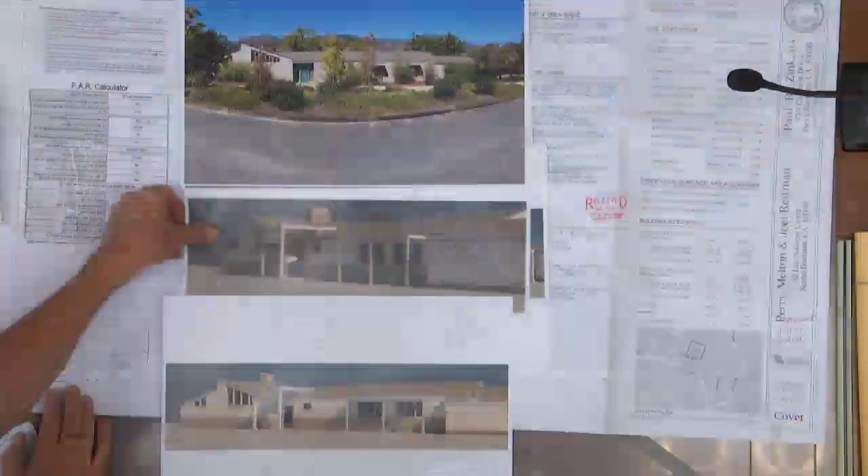Those other options are in this set. The one I preferred, that I thought was a little better, was the flat version. I thought the angled one conflicted, and I thought the flat was better, but the designer and the owner are passionate that they have this kind of style with this configuration. So that's an issue, and they wanted the full board's input.

Denise, did you have any comments? I agree with Brian about this, that the flat configuration, cantilevered without the posts in the front, was more desirable. Okay, so that's why you brought it back. So if you could kind of share with us where you're headed.

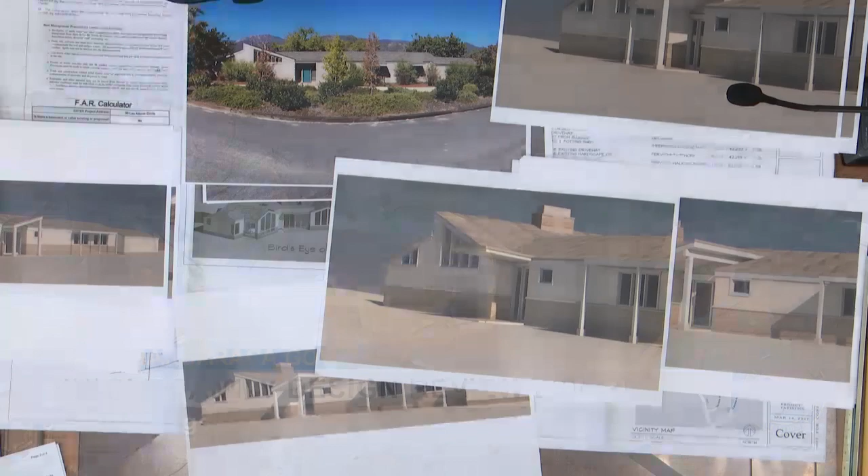Brian had basically asked, did you consider other options? During the design process we did, and then we went back and revisited it, and we changed and tweaked the look. This is the look that the client and I have gone back to a couple times, and that's what we're happy with and want to go with.

Since then, we're looking at it. What's interesting about the existing house is that there are some very strong forms, but the front entry is very nondescript. So that's where we're trying to create an entrance that says, hello, this is where the front door is, come take a look at us.

So we don't have a problem having an angle here, because this angle relates to the angle happening over the master bedroom. But you can tell by the landscaping, it's not really prominent or evident. Approaching the house, you'll be able to see this. So to me, it's an architectural element.

This is very quiet and almost lacks any punch, more punch than what's currently here, because this is completely understated. In reviewing it, going up to the house after we met with Brian, they are leaning towards this way only because they feel forced to or required to.

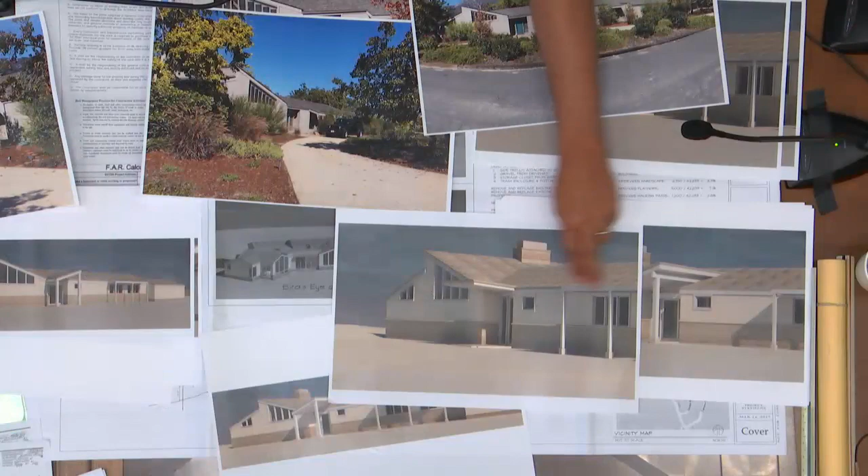If we were to go with a solution like this, we will change the overhang that we currently have. This is a pergola that we have that'll have a shade cloth on top. The reason there are these existing little eyebrow roofs, part of the architecture, is because it gets beaten by the sun, both on the south and on the west.

So I actually have a horizontal element because these come down and block the head of the window. So when you're looking out the window, you see the underside of the roof. In designing this, one of the principles was how to create a shade structure for these windows that didn't block the view but shaded the windows, and then have something completely different for the front entry. That was the design theme, and having the angle of the roof was a great quote of the other architecture on the building.

Could you show us the flat elevations, please? Yes. Oops, sorry about that, I thought it was empty.

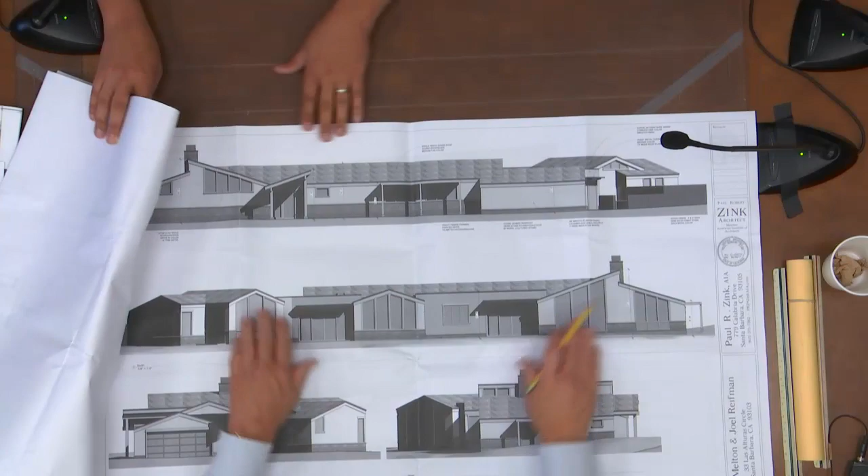I have since put these, once again, in 2D form in the computer, but these are basically flat 3Ds of the computer model. This is where we are, and this was the older version where Brian commented, can you please go back and revisit it?

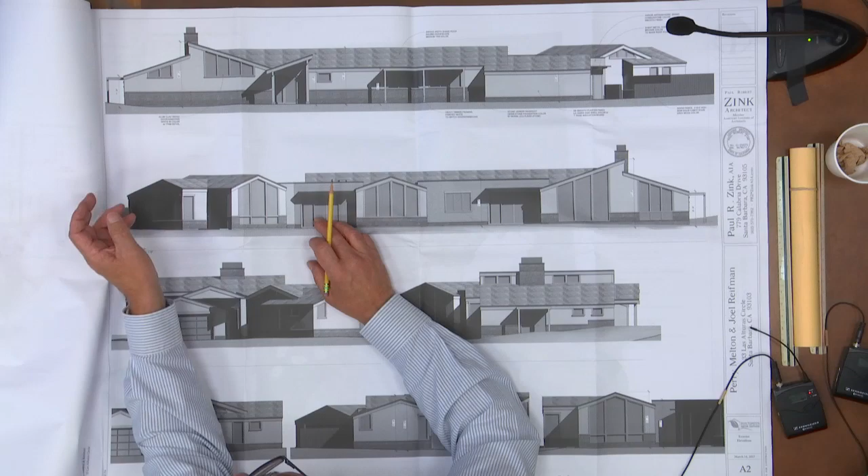One of the principles was we have a major beam inserted into the main living room, so for me it was trying to have a continuation of this beam from the entry all the way through to the living room. That's how this initially started. When Brian made his comment during the design review, we ended up removing that beam and taking the columns all the way up.

The other interesting thing happening is this corner right here, we have some horizontal siding above the door that turns the corner slightly. It relates to the horizontal siding we have at the back of the building. Now at the back of the building, we do have these lower 24-inch metal overhangs.

This is probably what we would quote and put over these two windows. If we were to make this a cantilevered roof element, I would take this design theme and put that over here, and I would pull these windows apart, because I intentionally forced them together to have one element—right now there's two windows that are like this. All right, questions of the board?

So where we are right now, what you're proposing, what we're asking you to do is to flatten this and give us that. So we're gonna end up flattening this thing and just cantilever it out with no posts.

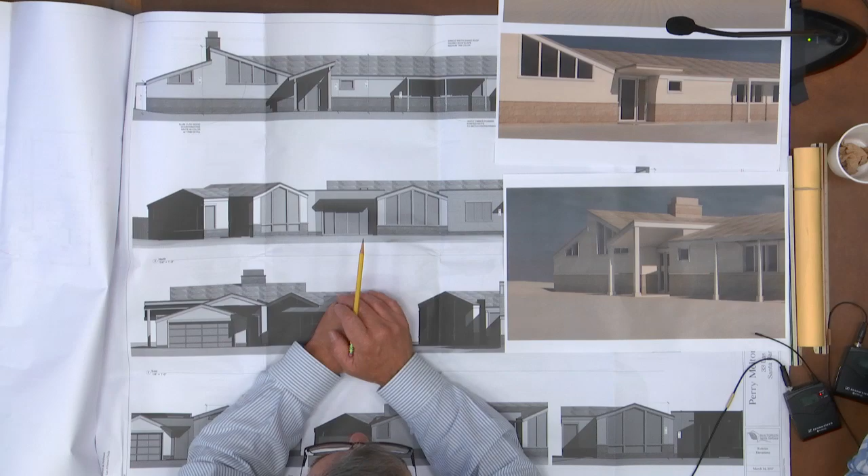And you're gonna remove these posts over here? If we go with this option, then we will remove these posts and we'll change the detailing of this to match an overhang that we have at various parts in the building. It's not our preference, but it's the backup, because we have to look at it. Okay, other questions?

Will you have an intense landscape program to go with this? Yes, we have a complete redo of the landscaping. This is high fire, so we're not allowed to put anything on the shade structure, so it's not a pergola per se. Having vines growing up and over these columns isn't an option for us.

And Denise, you've already looked at the landscape plan? Yes. Paul, are you proposing a glass garage door? It will have opaque panels, but yes, it will be that style. So it won't be translucent.

Okay, another question. So these are new windows? Yes, they are. And they're going up, is it 7 feet or 6'8"? I'm picking them up to 7 feet. Right now they're 6'8", so that line right there is roughly 7 feet. Correct? Okay.

I have the existing elevations if you want to see them drawn. Just so you know, the window structure changes from the original house because they were originally 3 bedrooms, and we're making... understand.

Okay, I'm gonna take some effort here, but just to get this to move along. I think that I could live with this, but it needs to be...

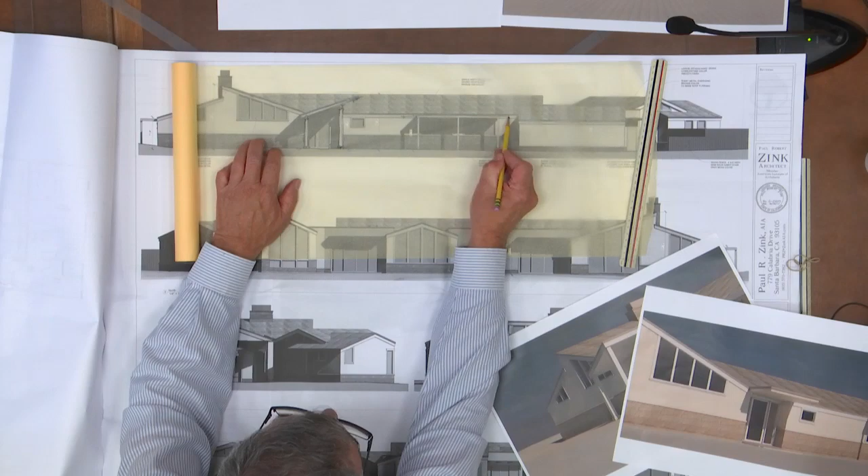And I would extend that out, and I'm trying to get a proportion of 2/3, 1/3. So get this to be 2/3 of this angle here. Let that go up, and then take these guys and really get them out here and use the same language.

Okay, and then you get a shadow line down there. Then I think, and if you possibly could, get that glass to go up here. You've got glass cutting the edge of that, so let that be glass, let this be glass, let that all be glass, and really buy into the statement you're trying to make here. That allows you to get a shadow here and that shadow here. Then I think it kind of makes sense, because it's a proportional thing between that and that.

And let this beam, don't let that beam - the problem with this beam is that if you let it, then you have to deal with dry rot. So let this eave come like that, let the beam come here, and then take this column so it's sitting back, the beam's kind of hidden more. It comes back under, then you don't have to worry about the maintenance, because if you bring it out like that, then I always put a piece of copper over the top of that, because otherwise it just gets dry rotted instantaneously.

So you either do it that way or do it like that, and then put a copper flashing unit over the whole top, have them fabricate a piece of copper over the whole top. That saves you forever. If not, get it tucked back in, but let this thing do that. Pretty wild, quite a statement. I mean, if you're gonna do it, do it.

So the opaque material is what? It'll be glass, but that milky white glass, not clear. Here's the garage door for this. We haven't finalized that. Okay, well, you're going to get it finalized one way or the other right now.

Brian, what did you guys make comments on? We made no comments on the garage door. That kind of slipped through the cracks, so that's up for comments now. Here's the garage door, here's the cul-de-sac, so it's not a garage that faces the cul-de-sac.

I do understand the concern about having clear windows, because when you turn them on, they look like a fluorescent light fixture, so that is not what we're proposing. When I say it's opaque, when the garage door goes down, it's like, wow, look at that contemporary house, isn't that cool? But when they turn the lights on at night and forget to turn them off, it's not going to glow like a kitchen ceiling.

I've been going around, and since Bernie keeps bringing up these opaque or lit garage doors, I happen to look at them constantly as I drive around town. They don't put out any kind of torch, they just look like a garage door with some light behind them. If the light is allowed to shine through, yes, it lights up the whole area, but garage doors that are just opaque lights do not brighten up the neighborhood.

I'll address that, because I know there are a lot more of them around town, and they're easier to spot - while you're on Shoreline, while you're on Balboa, there's one. They're coming up all over. So I think in terms of neighborhood preservation we have to be careful, because they're very modern. They do change the character and feeling of a neighborhood, and maybe they're okay in some neighborhoods and designs, but I think we should be cautious.

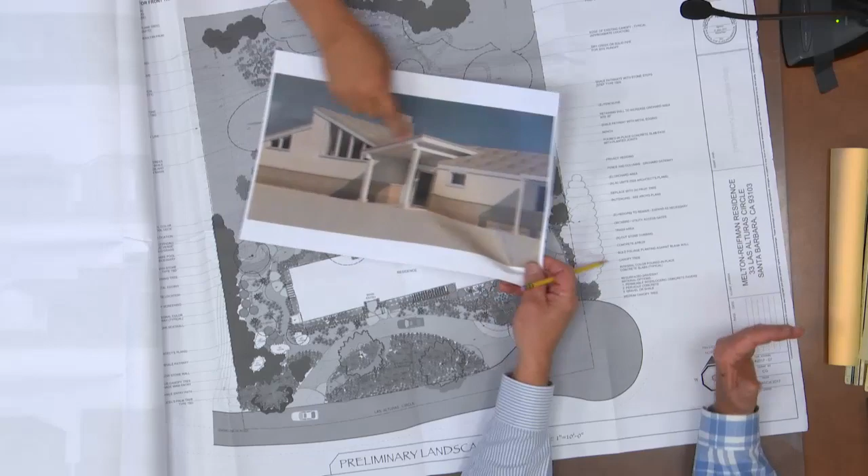But we're going back now, we'll make it a little longer. I felt that this was complicated and that they were fighting each other, so that's what we resolved, some. That was my opinion. Other comments?

I think the house is a modern enough house, and it's in an area that could have a garage door like this. Okay.

I'll just point out, given the landscape plan and the position of the door, and having been on the street, as you recall we have reviewed extensively a house here. We've reviewed extensively another house that Paul did down on this side. We've had this whole community come out and be at this meeting, so we've looked at this neighborhood, this particular street, extensively.

I agree with my colleagues, it will have less of an impact versus the ones we see over on the Mesa where the garage doors face the street and do glow. Not all of them glow, but they do glow. In this case, I think I could live with it since it's facing almost nothing, given the end of the street here. So I'm less concerned in this particular case than I usually am about garage doors.

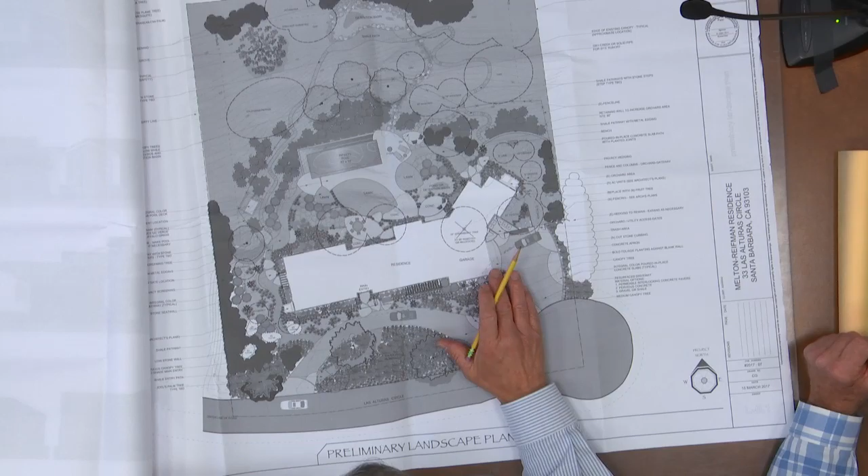Okay, other comments? If not, I think what we're required to have is some kind of motion. Katie, is this a final approval? What's the process? It's eligible for project design approval, not final. So if we're so inclined, we can give it project design approval with comments, or direction, whatever the board's pleasure is.

And then if for some reason we decide to go with another option, we'll just go back to consent with option number four.

So the chair is looking for a motion. The board would like to give this project design approval to return to the full board. Can we go back to consent? This is a one-story building where we're more than 4,000 square feet, but we're only doing a 1,000 square foot addition to the existing. I'd recommend consent. Okay, to return to consent for final approval, correct? Final in two weeks? No, indefinite. Final drawings take a while to do.

And the board finds the architecture to be appropriate for the neighborhood, with the comments that the roof and entry eave be configured in a way similar to the suggestions made by Mr. Sweeney. And that we approve of the glass opaque garage door.

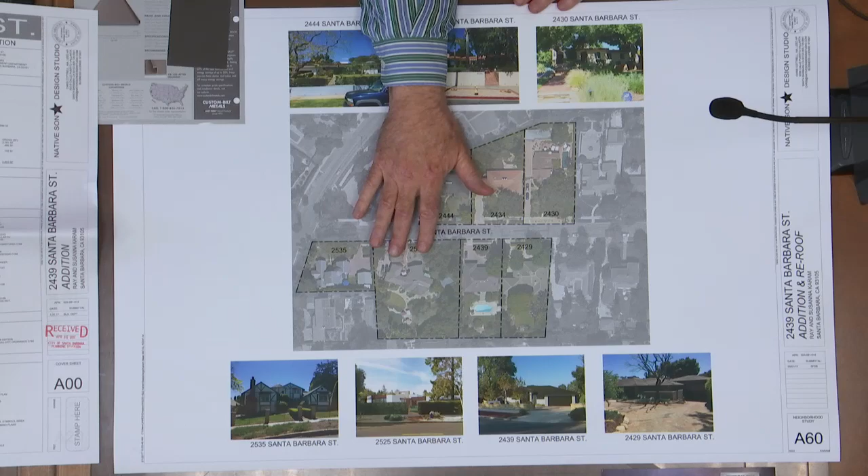I'm going to hand it over to Chris to give you a little bit of the background story. This house at 2525, presently occupied and owned by the Karams, the same people making this application today, was a Brett Edinger project that is approved. When the house next door at 2439 came available, the Karams said it would be great if they could purchase that home so they could live there while overseeing construction of their other home at 2525 Santa Barbara. So they completed that purchase and are in the process of remodeling 2439 so they can move in and then begin 2525.

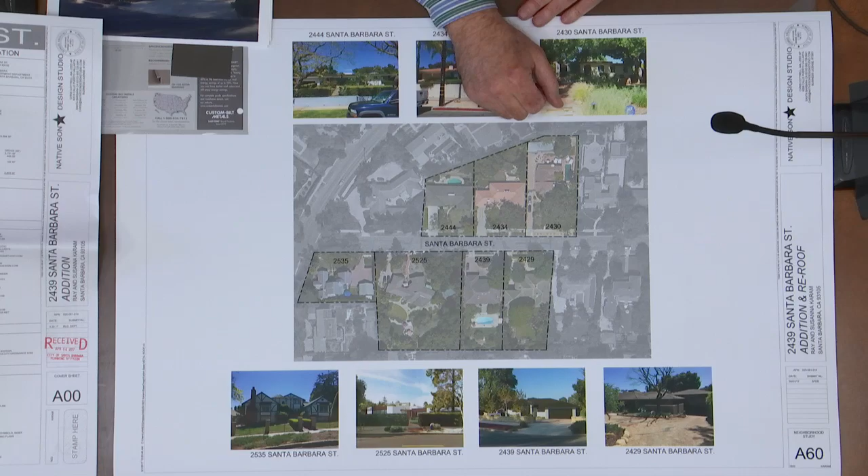As they were looking at all the materials available and what their particular style is, they said they'd really rather go with a standing seam metal roof on this house rather than fiberglass shingle, CertainTeed Presidential, or whatever else was approved. They think it fits well with the form of the house, and it's obviously very similar to the other houses in the neighborhood. It's a full hip roof form—nothing has changed—but they like the aesthetics of the standing seams coming up and meeting on the hips and at the ridges.

They're also very interested in PV, photovoltaic panels, which will go on the south side of the house. They're particularly well adapted to standing seam metal roofs, with little brackets that slip right over the standing seams—no boot, no penetration, just holding on to the seams.

Can you explain a little more what those are? Yeah, so this isn't the color we're proposing, but this is a typical standing seam roof. Traditionally, solar panels are mounted on a boot that goes right through your roof material and bolts into the sheathing. This bolts right to the seam, so there's no waterproofing issue at all, no penetration at all. So that's one of the drivers, together with the aesthetics.

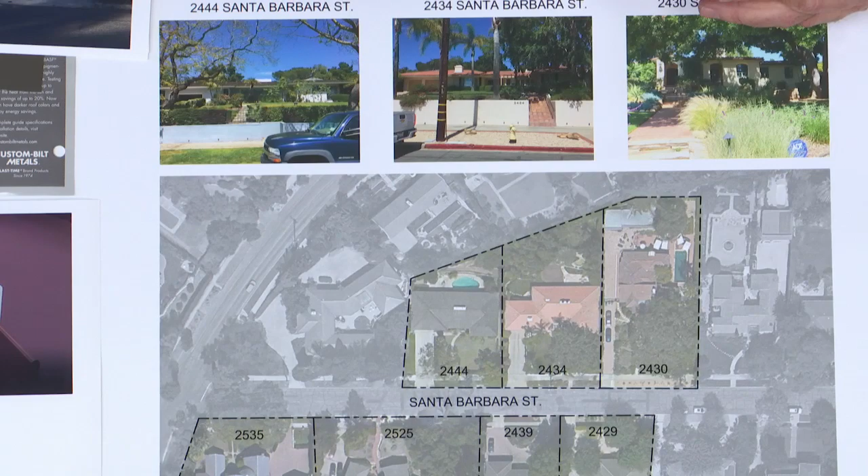It's an environmentally superior product to fiberglass shingle, and it's obviously fire safe. The color we've selected is called antique copper, but it's weathered, really to match the anodized bronze windows used in this house. The window profile is actually very thick—they're Schuco, a German product—so the gutters are the same. It's a house that's evolved over time, built in the 60s, which had a shake roof initially, and when the project started it had a very heavy concrete tile roof, a Monier tile roof, that's been stripped off. The framing really wasn't strong enough to handle that roof, so we're proposing to go to a 24 gauge steel baked enamel finish roof.

Okay, is that your presentation? At least for now. All right, so is there any public comment or letters? No mailed in or written public comment. Okay, thank you, so I'll bring it to the board—does anyone have any questions?

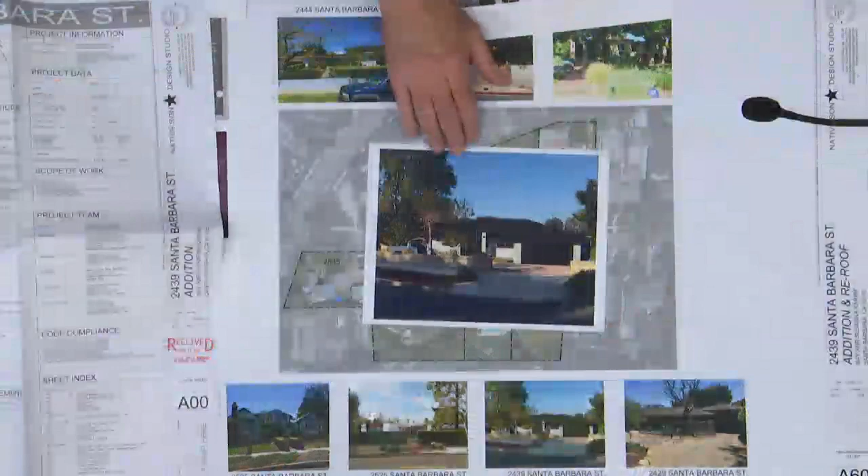Yes, thank you—can you show us what was approved the last go-round? Yeah, it was a presidential asphalt shingle. Can we get a visual on that? Thank you, and this is the rendered view with the standing seam. Oh, I see. Sorry, we should have put that up for the public to see.

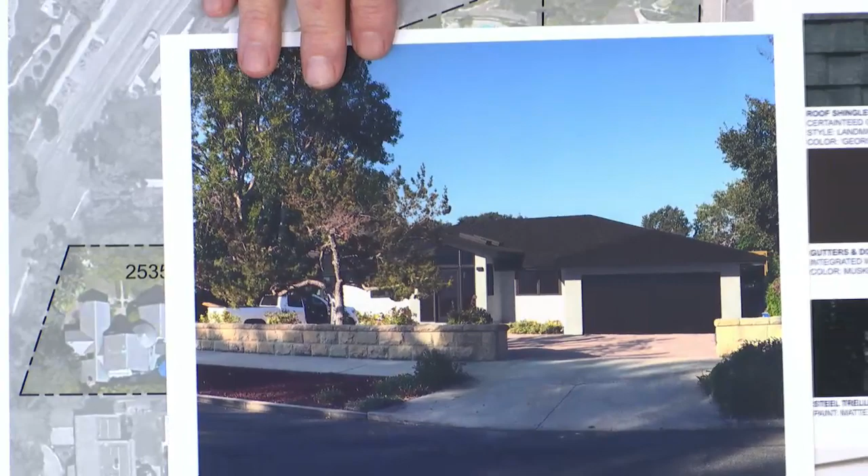Can you tell us how many of those solar panels there are and what they look like? The solar panels are on the south side of the building, not facing the street, so they can't really be seen. They will essentially cover the entire south-facing roof plane, which is on the back of the house—so that entire plane will be filled with those.

So are there any neighbors on that other side that look into it? No, it's pretty well isolated. We don't have a copy of the assessor's parcel map, but the parcels in this area are all relatively large. I'm familiar with this area, they have extra long, deep parcels on the outside.

The two adjacent houses shown are exactly parallel — this is proposed, and this is the subject, and this is the joiner. The roof forms on these houses are all very similar, they're all full hip. They've transitioned — this one is still wood shake and needs to be replaced, this one was transitioned to a simulated, I'm not sure if it's S-tile, but it's a Spanish tile appearing roof.

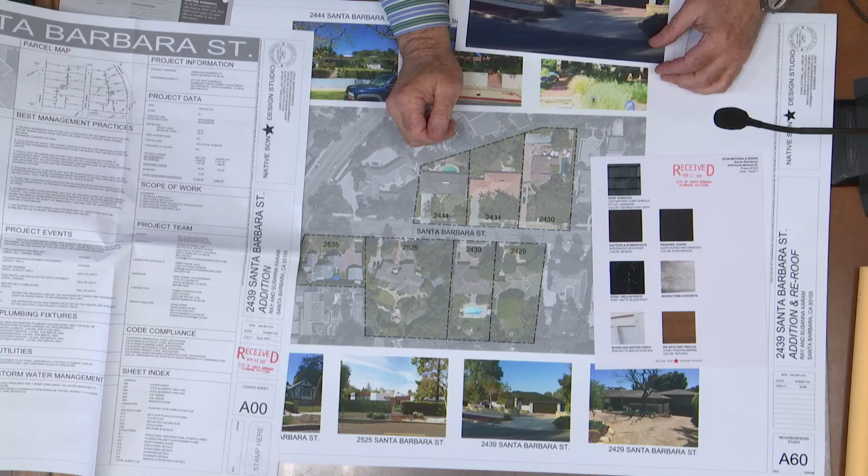So are there other houses in Santa Barbara using this technology? The standing seam roof is a technology that's used frequently in Mission Canyon. No, I know about the standing seam.

I'm asking about the solar — hanging the panels that are going to be all over the back of it. Oh yeah, that's standard. That's one of the chief advantages — you don't have to have a steel frame with penetrations through the roofing membrane. There are a lot of solar paneled houses here in Santa Barbara, and the criteria usually is that they're not seen from the street. That's a city requirement, because the state of California says we really can't stop you from putting solar panels on. It's state law, you can't interfere, but most people are coming to you saying they're putting in solar panels and they show them on their plans. They don't want to have a fight.

So here's just the existing site plan again. There are some changed statistics. There's about a 50 square foot increase in what we're proposing from previous, and that's just because of addressing the comments where we were playing around with the second floor where that landed.

So here again is the proposed site plan. The darker areas are the first floor additions. The crosshatch area is the second floor addition, and then here is the second floor deck. There was an interior change - we relocated where the stair was. Originally it was up here, so we basically flipped this on the floor plan. The other minor interior changes, I won't go over those.

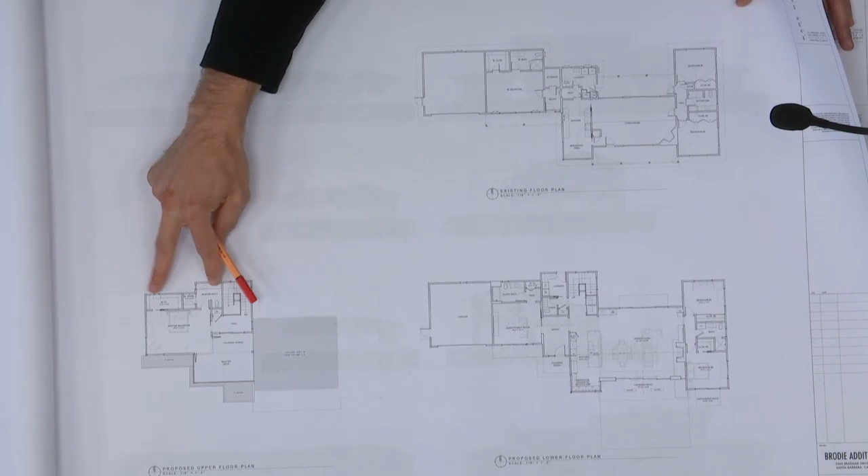Second floor has also changed. We pulled that back in a little bit, and what that did is it shifted all of this mass closer to the intermediate mass. So now, this used to be over here more, and there was a gap in this portion, so we've made things a little bit cleaner. I know that was one of the main concerns.

The other item we've made here, which is a comment from the board, was regarding the breakups. We've made that more consistent throughout.

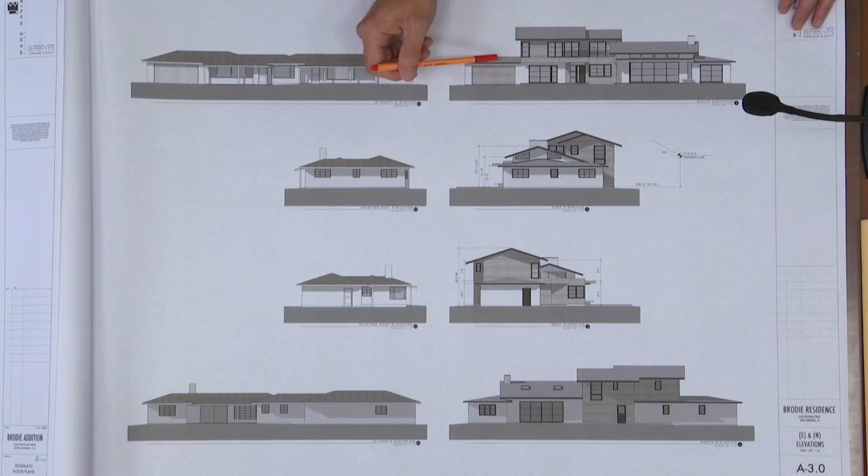We looked at a couple different options for the roofs in terms of the hip versus the gables, and we felt like it just became too modern when we did a flat roof on the lower floor and kept the gable on the top floor. But these are actually being reframed at a lower pitch again. The intention for these is to make this feel as if it is just lower - we're trying to make this feel more important. So that's why we were lowering these pitches.

Also, for the appearance of these lower pitches to have that flat look when you're standing at the house, and for this to be the more prominent roof element, but still have the softening effect of the overhangs and the more traditional effect of the overhangs as well.

There was a concern also with a lantern effect for the south elevation. So this is a view of what you would see. This is some of the existing screening on site, and the house is back over here, which the second floor would come up a little bit. But you can see that you aren't going to see a huge amount of this structure. They really don't want to do a whole lot with that lower portion of the lot. They want to keep it pretty natural.

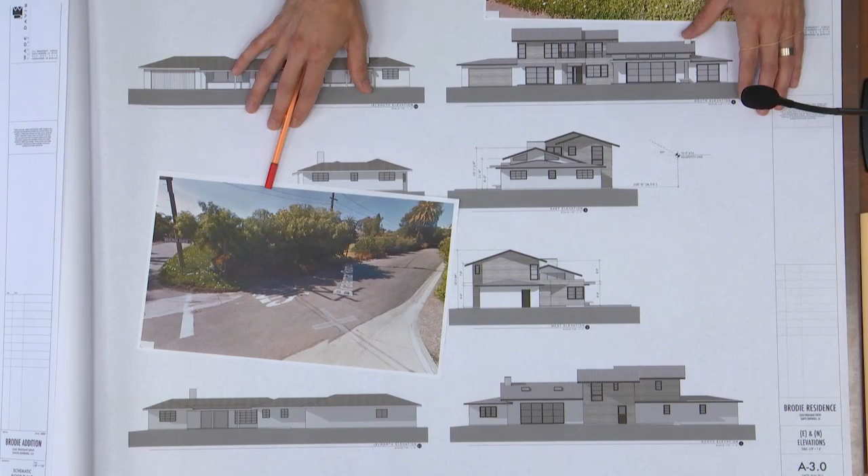They will clean things up and increase the screening. As you can see along here, they've got 2 dead trees that they want to actually replace and make it so you can't see the house even more so.

We also have provided some renderings too, which was a request of the board. So again, similar to this view, this is actually getting rid of some of the screening too, so you can actually see the house, because otherwise the rendering would just be this.

Mr. Chair, I do have minutes, by the way. I don't know, okay, if you want to come back to that. Let him finish, and then we'll come back to that.

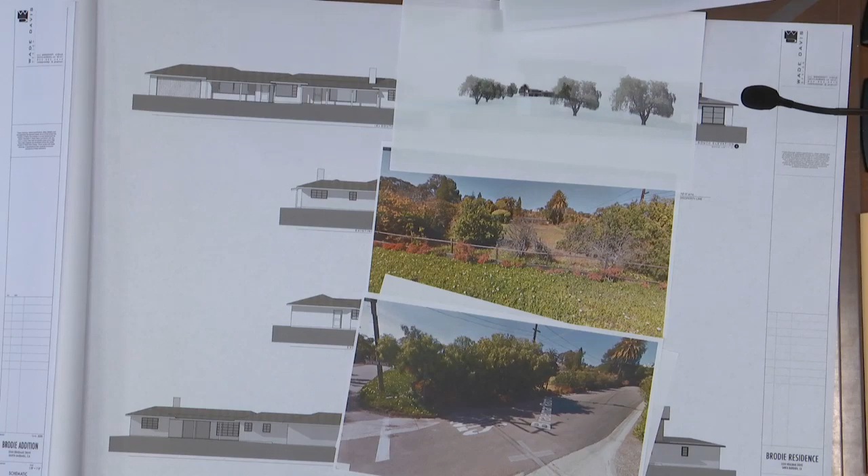So there's the first view, and again, this is similar to the view here. Then from the center of the lot, this is again the same views. And then as you come up the driveway, this is the view that you would see. And then at the motor court itself, here's again the view.

This is actually shifting over closer to the center of the lot and a little bit further to the east - that would be the view that you would see. And here's a bird's eye view, and then I also have just a couple of close-up shots, and then the entryway, and then from the second floor deck. And then here, there's 2 also of the rear of the house too, which I don't know if is of much concern.

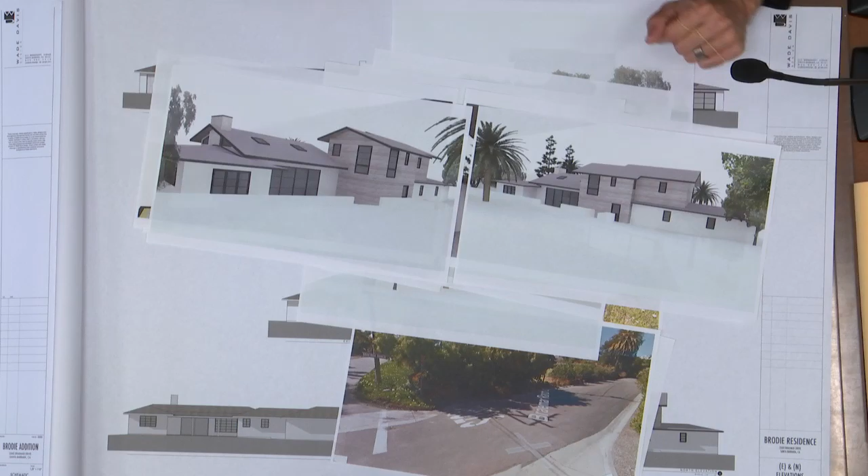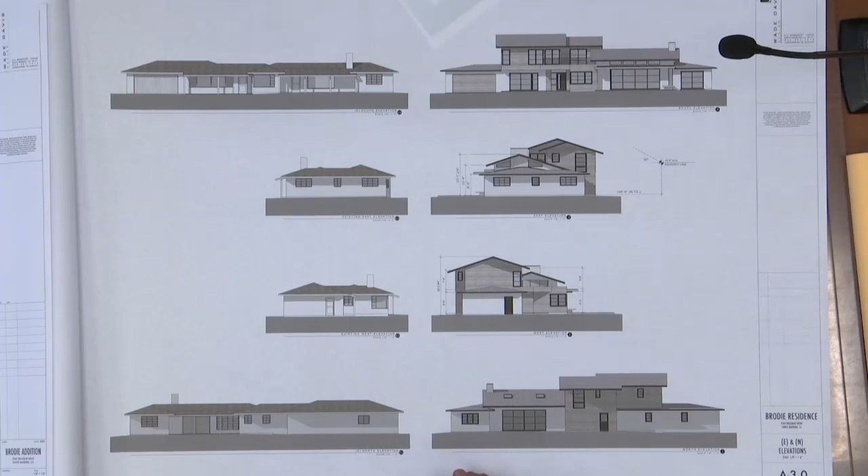Okay, anything you want to add? There was comments last time regarding some of the windows facing the street. One being, in this area here, we did reduce the amount of glass. This was wall-to-wall glass, and this as well, so we did bring it in, but we're trying to be sensitive to that being the main viewpoint from the main space of the house, and also trying to capture that ocean view that they do have.

There was comment also on this elevation here where we had smaller windows. What we've decided to do is keep the same size windows that they've got currently, and handle privacy from the road with hedge screening along the property line.

And that's about it. Okay, thank you. Brian, if you could read our comments, please.

Number 1, provide more development and renderings of the elevations, which you did. Number 2, study the horizontal and vertical elements of the windows in relation to the overall style of the house. Number 3, study the roof configurations of the second story in relation to the first story with the hips and gable elements. Number 4, the board recommended not using glass or opaque materials for the garage door.

Number 5, reconsider and provide further driveway and fence details. Action taken by Miller, seconded by Motisha. Motion was carried. Okay, thank you.

So before we go to questions of the board, is there anyone in the audience wishing to address this project?

Katie, did we get any written comment? No, we did not, Mr. Chair, but I did want to clarify. You had asked me last week what your purview was on the landscaping and the fencing around the accessory dwelling unit. I talked to Hyman. He said that would still be under your purview to comment on. Just right up to the wall? Yeah. Okay, all right, we wanted that clarification.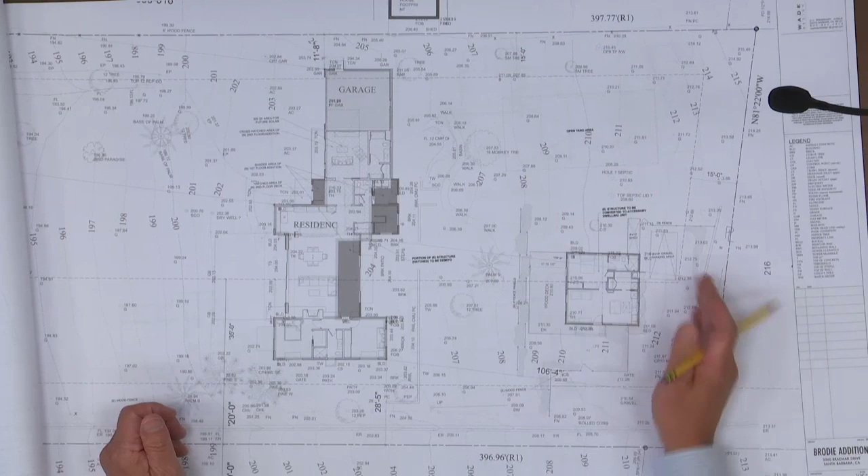That's correct. Okay, so I just want to make sure we understand - nothing to do with the accessory building is under our purview. Right, so we can't say we don't like the parking place there. That's correct, because that's not our purview. Okay, all right, are there other questions?

Yes, Mr. Chair. So one of our comments last time was to study the horizontal and vertical window elements, and it still seems - well, maybe we can talk about that. Okay, so that's a comment, but yeah, do we have other questions?

Did you reduce the top windows? Is that the only thing? We did modify some of the other windows slightly, but the biggest change was reducing the glass on that south elevation.

One of the comments we had was to reconsider and provide further driveway and fence details. You indicated your client isn't intending to do a lot of further improvement other than what's on the house. Could you clarify in terms of landscaping, driveway, fence, et cetera?

Yes, so they are going to leave this natural for where it is right now. There's a couple of existing trees that are dead right now, so they will replace those just to maintain the screening provided before they died. The driveway, they are going to keep and repair what is there right now because it's a long driveway and an expensive undertaking to replace.

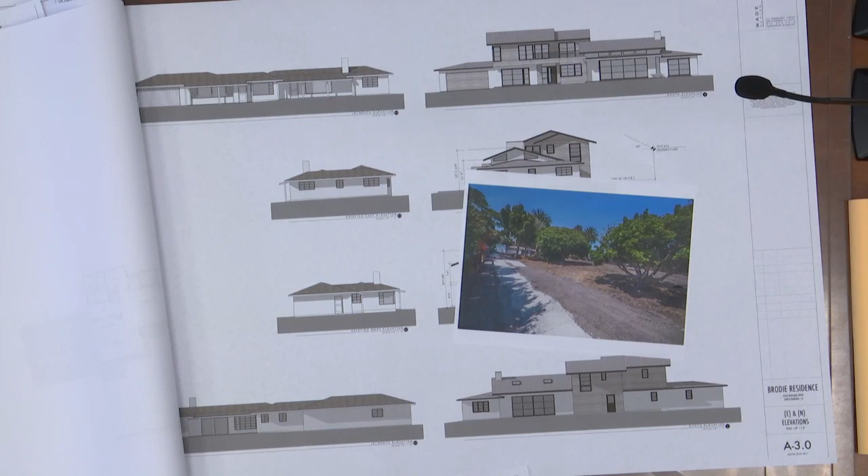Are there other comments? Mr. Chair, yes. I just handed you a picture of the driveway, which I'm really having a problem with if somebody's going to do all that knocking down and rebuilding but keeping a lot of that driveway. It just doesn't really seem to fit the whole design concept.

Okay. Other comments? I'll follow up on that. Yeah,

I'm really perplexed that they're going to spend all this money to do this part of the house, and yet they're not going to fix that driveway. To repair it, let me finish, I've been out to the site and walked the site. The damage is extensive, so it's like you have to rebuild it.

So by the time they get in there to do whatever, they're going to be rebuilding it. So I think we need to see a repair plan in some detail. What are they really going to do? Look at that, half of it is just filled in gravel, the other half appears to be asphalt or concrete. So I think we really need to see how they're going to deal with that driveway.

I agree with you, Bernie. I think that's a little bit perplexing in terms of the amount of money that's going to be spent. With regards to what's been presented as the architecture, I think it does what we asked it to do. The alignment of the glazing elements, the fenestrations, are now in a nice rhythm. The pattern language of the elevations works quite nicely. So I think that kind of all comes together.

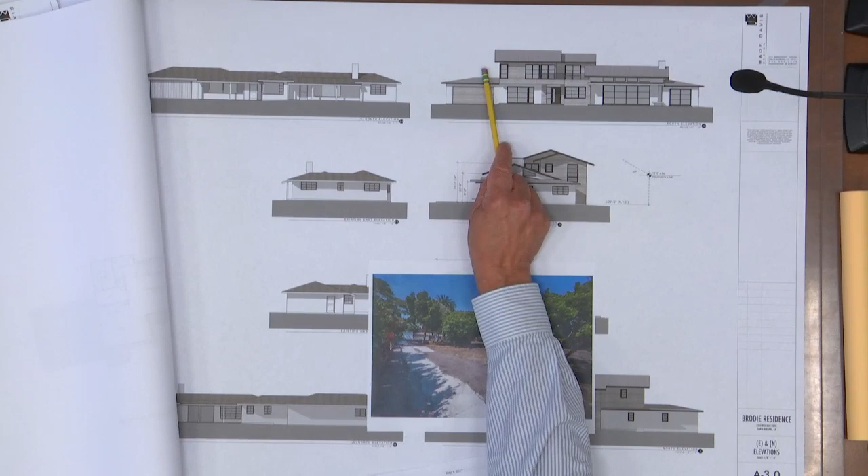I guess I'm not completely convinced about the slopes of these roofs. I think it would look better if they came up further and appeared to get a little bit more tucked into the whole composition. But it's not, in my view, a deal breaker for giving this project the go-ahead.

But I am concerned about this whole driveway thing. It says on here, review after final. Did we all? No, am I on the wrong page? You're on the wrong page. So it's comments only. Oh, okay.

As I said before, the applicant is wishing to proceed to the staff hearing officer, and if we're so inclined to encourage that to happen, then the staff hearing officer is going to want to hear about our comments about these two sides of the house in terms of the modification.

Mr. Chair? Yes. I'd just like to make a couple of comments before we make a motion. We have to make these quick decisions, and I'm having second thoughts about a decision I made on the last project already, and I'm really having second thoughts about the overall design on this project. I know the neighborhood, I know there's a lot of development going on, and I know what it looks like, but when we take a completely different approach to the rural character of a neighborhood, I don't think it fits. I don't think it meets our guidelines.

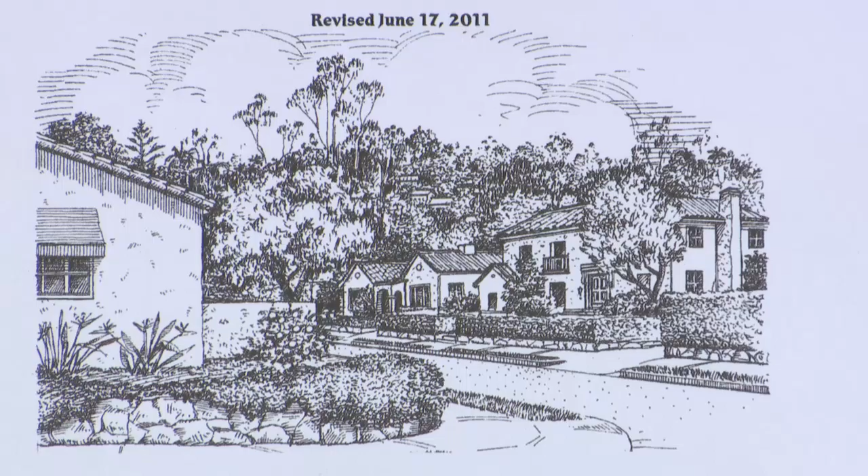Okay, thank you. I'd like to discuss the horizontal distance. In your guidelines that were updated in 2011, there is a specific section that discusses hillside housing. On 29.4, let's pick this up and read it exactly, please. Homes with a total run of less than 60 feet in horizontal distance for combined steps are preferred. Seems pretty clear to me.

And it gives a couple of examples. It gives one that is approximately 66 feet, which it doesn't like, and one that's 50 feet that it does like. I made an approximation from the back of the garage to the front of the front bedroom is 118 feet. To me, this is a little more than 60 feet. Specifically, in your guidelines, it does say 60 feet is preferred. I can see going a little over that, but 118 feet seems to me to be excessive.

Along with the height, I believe this house is too big. So I find it hard to believe that something like this can be approved that contradicts the City of Santa Barbara guidelines by such a wide margin. Thank you.

Here you can see that the coastline, the ocean, and now the islands have been blocked. We used to be able to see a little bit of the islands. And so, this will be our view. And I put some trees because we will be able to see a couple of trees.

I would also like, in closing, to use Loy and John Beardsmore's words that so eloquently stated how we feel. They say Mr. Suryan has consistently shown that he wants what he wants, and the board is the only entity standing between him and longtime neighbors losing what they cherish.

Does the SFDB allow one part-time property owner to wield so much power at the odds of his neighbors? One new neighbor can take away what has been of value to his neighbors that have lived on the street for decades. Seems considerably out of balance. Is it any wonder that animosity exists between neighbors if the board allows such designs to move forward at the expense and consideration of so many?

Please seriously consider the irreversible long-term ramifications if you allow this design to move forward in the interest of one resident over the objections of so many others. Thank you.

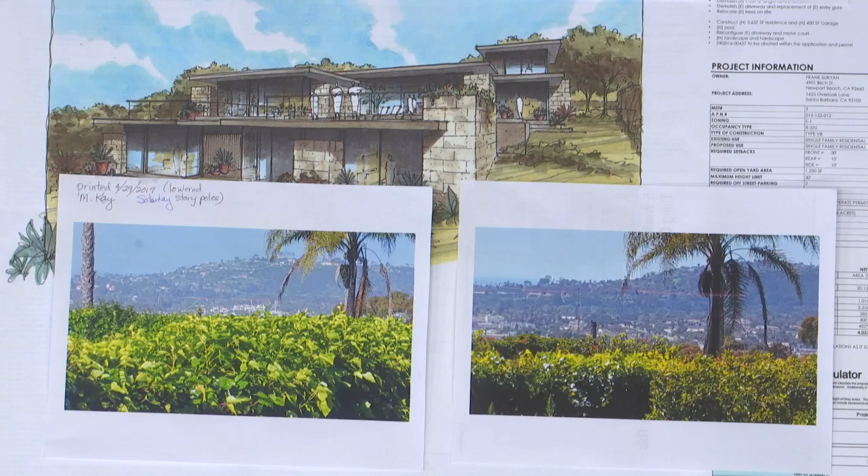And today, there's a new positioning of the poles that appears to show that they must be where you wanted them to be by today.

I didn't know whether wind had come through the night before, like we'd had, and that was the reason for changing it. Can you tell me why the original picture showed the poles being so high up on the tree, and then the next day farther down? My thought is, when final construction takes place, how do we know what the dirt levels are going to be where those poles are?

And this is from our back deck. I did widen it a bit so I could get the similar view. And then I drew in some lines. I'm not sure they're correct there, just to kind of see the configuration of what we would be looking at as well. Does this look accurate to you?

So Thursday and Friday we had them up there, and they were finalizing it Friday. So what you saw Thursday was them getting it up, measuring it, making sure it was correct. I came up Friday, made comments, and then the wind took them down Saturday, and they actually took them down again on Sunday.

So I was actually on site this morning, and we made sure it was back up. Just one of them went down. So I just have those three days, the last two days, where it's consistent, is where it was now.

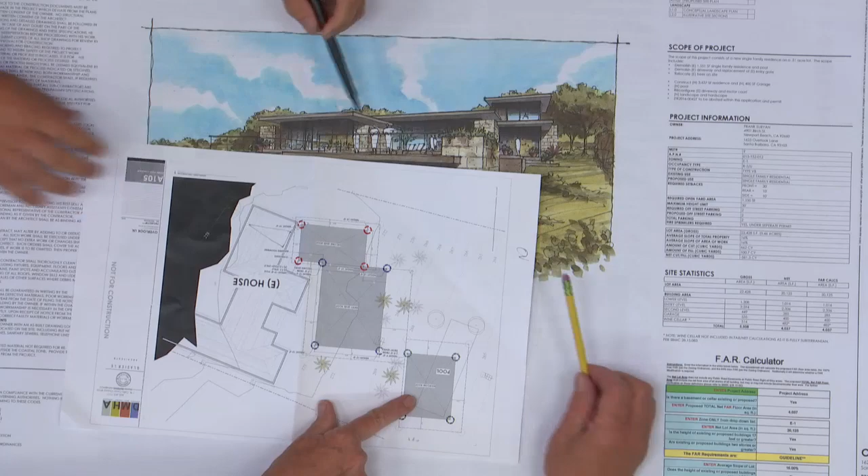Yeah, so what, that's a one-story element? This is on top of a podium, and there is a bedroom below it, yes. Okay, so that's a two-story element.

Let's look at sections or elevations - they will show it as well. So where are we? There you go. The master, is that what we're talking about? Yes, is that correct, this one? This piece. Yes, okay, so it's that.

And what are the plate heights on those? Yeah, let me show you in section. It's kind of...

So that's this element you're seeing, sitting over the subterraneous part - that's the cellar below it.

This is existing grade? That's the grade, so to the outside, that's existing grade. So that total height is what you're looking for at the farthest. So the story pole point that we saw today is right there, correct? Correct, that point right there, from the grade that we were standing on.

So then, okay, so that's kind of cantilevered over then somehow, or you're filling, digging down and creating this space underneath, or it's just? Yeah, what you're seeing today, from here to here, when the project gets constructed, we're stepping. So there'll be, this will be on the outside, we'll have landscape, which you can see in elevation. It just seemed incredibly tall.

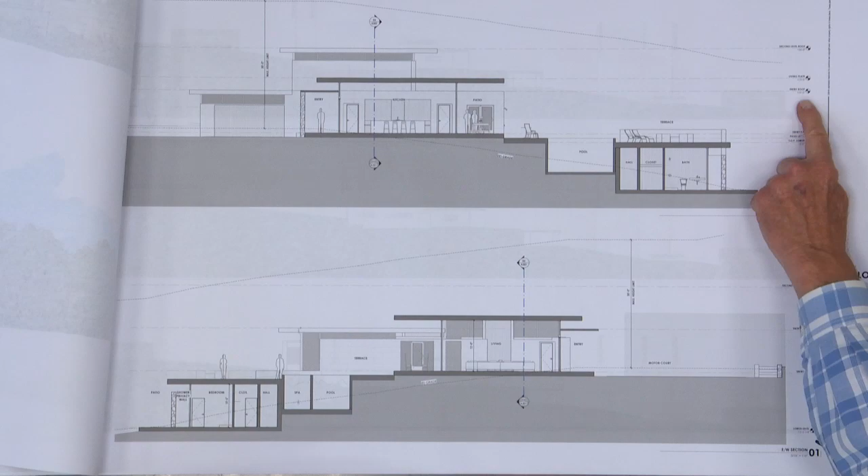What is the plate height here? The plate height in the master is - here we are, where is it, what scale is it? This is 3/16 - no, this is the wrong one. Yeah, this is modeled accurately. So the bottom, it's 9 feet. 9 feet inside, with the foot.

However, since the whole thing is kind of raised up off the natural grade, it's way up in the air. From existing grade, it measures 17 feet. And remember, a one-story building under city zoning definition is 17 feet 6 inches.

Also, my next question is the placement on the site. I noticed that from the old house, you have bumped everything very forward, and I suppose that's to maximize the views. Is that correct?

Let's see, that's existing condition. So there's a couple key reasons - one was pulling the cars up to the top of the site, just because all the view orientation is out, towards the island and downtown view. So the site's kind of flipped to begin with, so we wanted to put the cars to the back of the site.

And then the big decision to be made, which goes to hillside guidelines, is rather than stacking program - so the house wants to sit as a start towards the back of the site - rather than stacking 2 levels, we opted for pushing down. Now it kind of stretches things out. So our decision was, what's the right balancing act between stacking and getting to more one-story volumes? The consequence of one-story volumes is it just starts pulling down the site a little bit. So we're kind of trying to hunker down the site, but obviously our view corridor is out and through the front of our site.

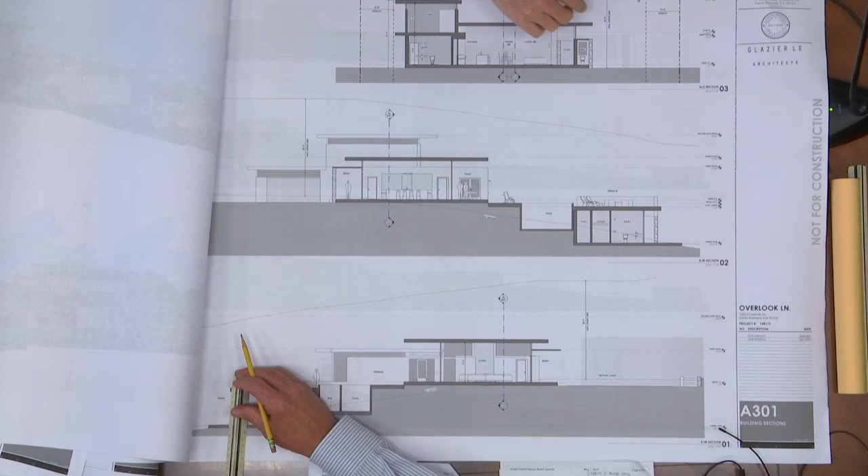10, almost 11 feet. So the grade is here, so they're down in the grade at the backside 6 feet, a couple of feet up here. And they're down in the grade 4.5 feet here and almost 2.5 feet there.

And a quick answer was, for that particular component, our constraint is that deck level, so everything's sort of sitting on top of the other. So, you know - speak in the microphone, please. So our challenge here is, this constraint again, 9 feet for a master suite, we think is the appropriate plate.

And again, yes, we are coming out a few feet from the site. What is driving that is this deck and the level below. Again, we're pushing that lower level down the site, so we really want to use that step out, and rather than seeing a flat roof, we want to use that for deck space. So we're stepping down to that, and we actually even pushed that down a little bit more, so we actually stepped down on it. But that's the driver, so 9 feet here and 9 feet here.

And the only other place we have to go is looking at pushing this lower level down a little bit. I mean, that's working with the site - the more we push, the more earth we're cutting and the more truck trips we're taking too. So this is a tricky problem to solve, but that's the constraint. So 9-foot plates stepping up on these two levels.

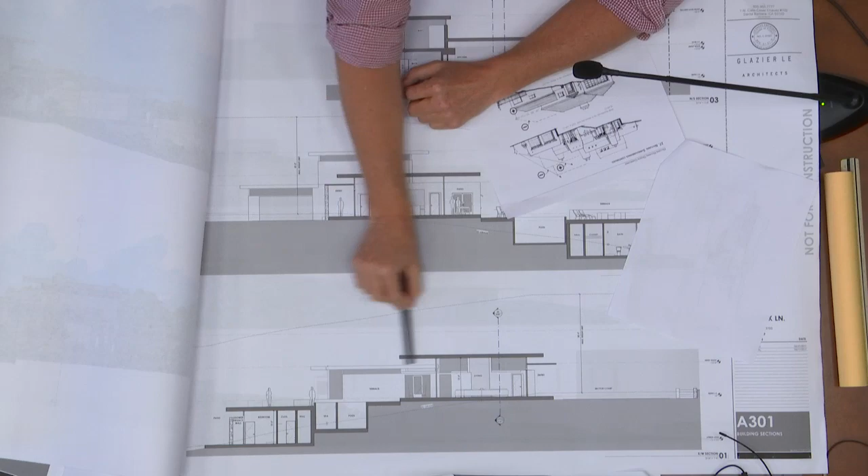And again, the positioning of this whole home on the site—is there any way you can push it back further on the site? We're really tight on room. We can't have any of our open yard requirements in the front setback, so we have to push it all in the back. So with the current design, this is our open yard area. If we push anything further, we're moving the second story somewhere else, blocking other views. So we're trying to minimize the massing.

I could say we obviously could look at a couple feet. We do have some. Where is this point in relationship to the existing house? Do you have that on the map?

So the back corner of the existing house is about there. You could see here, we do have a garage which goes 20 feet out this way—this isn't to scale, but it's approximately. So that back corner is what we're seeing on that other drawing. And the garage is just a single level. It appears you're at a 10 foot setback.

This line here was that stone wall we saw today, correct? Yes, there's two of them. And that's the higher stone wall the fence was sitting on? Yes, and the bougainvillea we were looking at was kind of right here, I think. For context, the existing house sits here—it's actually in its setbacks, pushed a little too far in a couple locations. It doesn't comply currently, but yeah, it's pushed very far back.

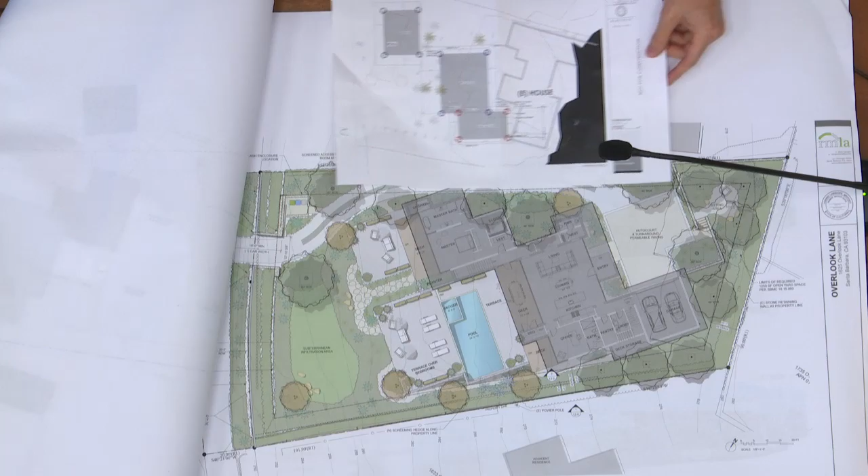However, when I look at this, I can see the neighbors upset with the fact that they've been living with this home that's way back there, and now suddenly you have come clear out here into the front and completely obscured—just to be aware, 50% of a neighbor's view. As you guys saw, it was a very small portion of an overall view. Not really, not in my opinion. But anyway, thanks for answering the questions. I appreciate that. Okay, are there other questions?

Well, I'm trying to understand—when we stood in the back, you and I, Fred, and there was that fence. Yes, right here. So I'm trying to understand where that driveway is going to be starting. It's not where the current driveway is—we walked up over here. It's going to be over there, on the uphill side, towards Cleveland School, so to speak.

But here's the house, so it's on the left side of the house. Yes, towards the back, behind. So the retaining wall we were looking at, the stone wall was here with the white fence on top of it. That citrus tree with the bougainvillea that overtook it is about right there. The lower stone wall we saw is right here, and the back of the house we walked behind of is about right there.

Okay, and this driveway, the current driveway, comes up like this and comes into the garage here. Oh I see, so it's just started at the street though, still. So the driveway starts at the street down here and goes that way. Okay, I get it. And the house, the first piece of real house, is whatever feet that is from the street—what is that, Mark?

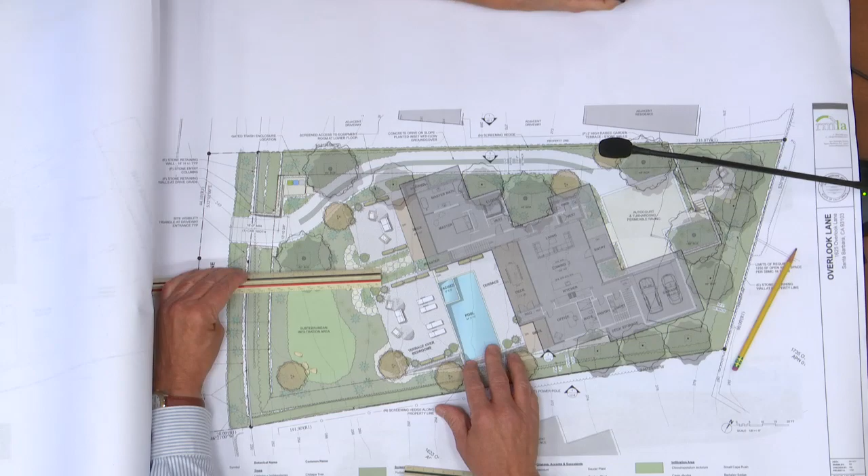We have—what scale is it there? What's the scale here, 1/8 of an inch? Where's the architectural scale go? It was just out. It disappeared. No, it's right here, I got it. So that is 58 feet, 57.5 feet from the street curb back to the front of the house. The first corner of the house is 57 feet back. Okay, thank you. All right.

Other questions? Let's go to comments. I believe that the applicant is still pursuing project design approval, and I believe our discussion at the last meeting was that there were comments in favor of proceeding, but before we did any further discussion, everyone felt we ought to do story poles—so that's what we did today. I think that's the point of our comments. We either have to determine that we're satisfied with what the architects and the applicant have presented and give it project design approval, or we could give it project design approval with comments for them to return.

We could deny project design approval and just give them more comments and have them return. So we've got a few options. Comments... well, I'd like to see some more changes personally.

I was astounded by the one neighbor, these folks here who commented first, when I saw the story poles and just what it was doing to the value of their property. Even though we're not supposed to be that concerned with personal, private views, the truth is, in areas like this, that's what drives the value of the properties. It's something I don't think can be ignored. This was really a big obstruction of their view, and that's really bothering me.

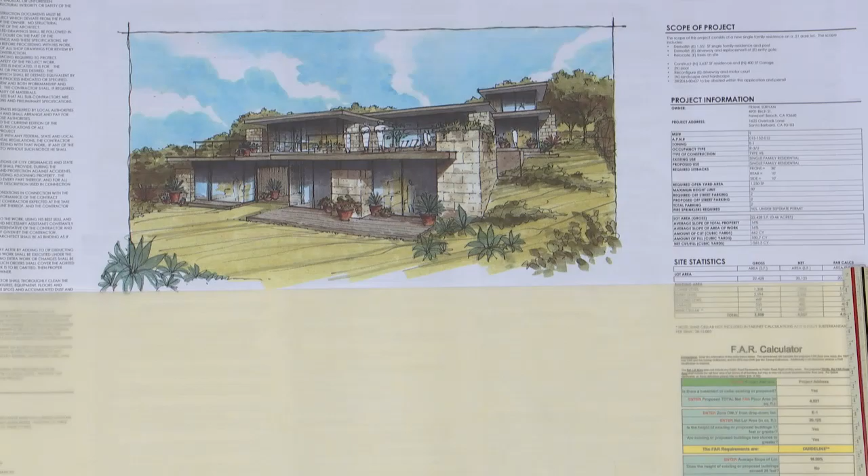Now, when we walked up the driveway this afternoon, this element here, which was in story pole shape, does appear to be large. But what I was really working on was comparing that form to the houses immediately to the west, not the immediate house, because it sits further back up on the hill, but the next house over. Remember when I asked about the elevation of that roof? And then looking immediately to the east property that sits right next to it, and looking at those forms and shape in relationship to this form and shape.

And standing at the bottom of the hill on the street, looking back up at the story poles, looking at it in relationship to the house on the east and the homes that proceed to the west towards Cleveland School. So I was kind of less concerned about the shape and height issue from the street.

So, yes, is the house big? The house is big, okay? The house is big. But as we've asked, the tool we have in our toolkit is the FAR, and they brought it down to 87%. Now, can we push for 85? Probably, but is that a lot of square footage when we're talking about 2%?

Part of the challenge here is this is going to be a transition neighborhood, whether we like it or not, because there are a lot of homes along the whole street that comes out to APS. There's a whole bunch of homes in here that need a lot of TLC, and some of them, probably when they do get that TLC, the property ownership is going to change. I've already gotten wind of the fact that I think it's this house or this house that's going to come to us for a second floor. That's coming at us, okay?

And we had a letter today that says one of these property owners up here - and I should be doing this correctly, Cleveland School is down here - is thinking, oh, I'm going to add a second floor. So that's kind of our challenge here, because this neighborhood is going to change, and I think you talked about it earlier about neighborhoods changing, so how do we deal with that?

The other thing I looked at as I was observing the story poles from the house on the west is, if you looked at the horizon of the ocean, Santa Cruz Island, and then you see the mesa, downtown Santa Barbara, Arlington, or Granada, and then the harbor, and then the wharf - what I noticed is, yes, a piece of the view is going to be gone.

But I also, as I was looking to the right, that's why I was asking about that house and that roof over here - if you looked over here, what would we have done with that house had it come to this board when this board existed? This house was probably done before this board existed, so we wouldn't have looked at it. But it, in fact, took away a view to the west. You can see how it kind of blocked out a view towards, what would that be, San Roque, the Upper East.

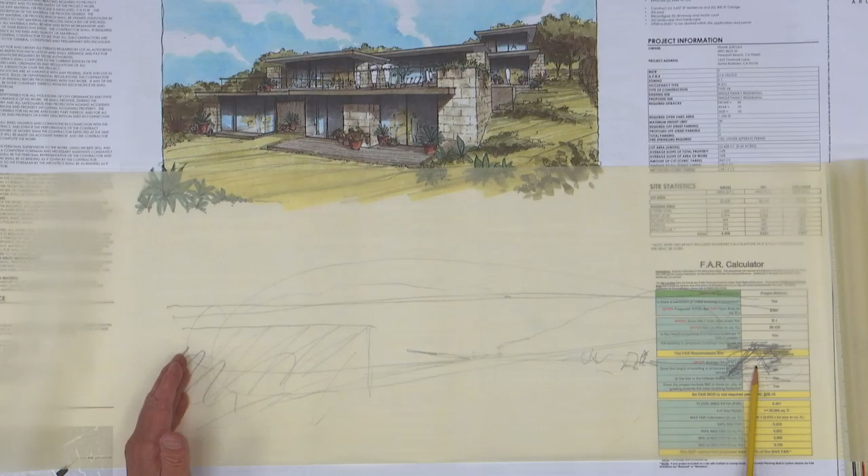So do we owe these folks that total view? Do we owe everybody that total view? Do we owe this guy that total view? That's kind of our dilemma. I bought my house, I bought that view. 40 years later, somebody wants to do something over here and somebody wants to do something over here. Are we obligated to give them, as I think Joe was pointing out, the 180 or 150 degree view? Are we obligated for everybody to get that view?

In the house next door, we're again looking at the horizon, Santa Cruz Island, looking straight out, and there was a hedge, and you could see where the top of this house is going to be - this piece up here was going to be right there. So one of my first concerns, which I think I already expressed, was about the glazing that's going to be either in or out on those two elevations, because it's right up against the hedge, looking straight down from the deck of this home. Part of the problem of looking at photographs is you can't see it in the whole.

Photographs isolate things, and as we just figured out a few minutes ago, if you move your point of view from where you've taken the picture, things change immediately. All of a sudden the telephone pole disappears from where it was in the previous photograph because you used the zoom lens or whatever. So photographs don't tell the whole story. I think we've learned that.

So I looked at that and I said, okay, yes, these folks are going to lose a little bit of their view of downtown. They're going to not see a couple of buildings along State Street down here, but they're still going to see the wharf, the islands, the mesa, et cetera.

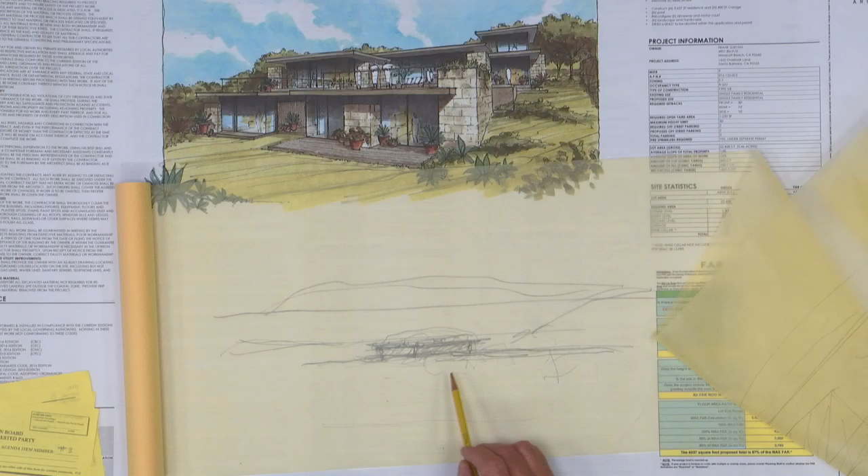Now, one of the other interesting things about the same property: when we walk down to the orchard, that view goes completely away because the site drops down. We couldn't see past the hedge. The story poles disappeared, they went away. So that meant that this hedge that's there now, and the orchard and the trees, block it out. Now that's not to say that in the future some new owner owns this home, cuts the hedge down to 6 feet, takes out the orchard, and all of a sudden can see the top of that house.

So are we the cause of that happening for a future owner? We don't have control over that. So that's some of the thought behind, in my view, of how you look at this.

And so the dilemma is: do we try to hold on to everybody's given view, and by not allowing the new applicant to have their right to a second floor — and then also, if we do allow a second floor, where is it positioned and what is it allowed to do? The same goes looking at it from the street up the hill, as has been pointed out by a couple of people concerned about the scale of the story poles. So that's kind of the issue. I'm not certain that manipulating more of this house at this point is going to get a solution that folks are going to be happy with.

Mr. Chair? Yes. If I may? Sure. I think that the answer lies in the degrees of view that are destroyed by any given new home.

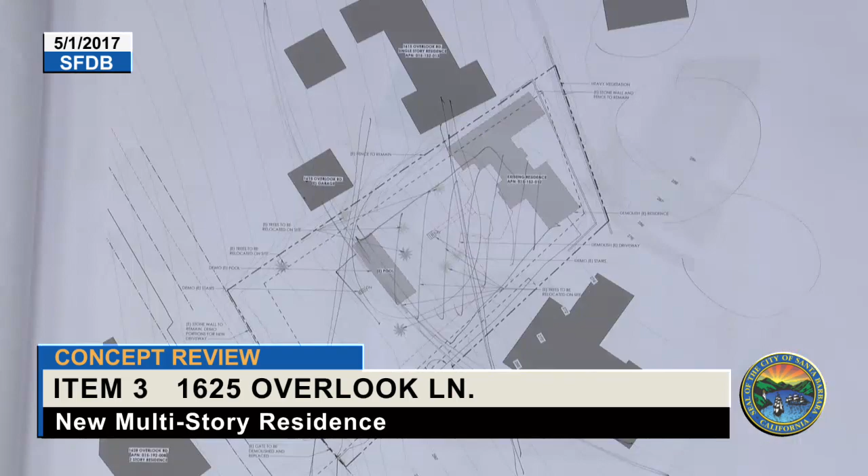Let me take just a minute to do this, because a question came up from one of the speakers: are the story poles that you see, those elevations, in fact the elevations? These drawings, when they go to the building department, have to show the elevations and all the measurements, and the elevations are based on these contour lines.

So that all is documented. It's done by a surveyor. So when this home gets built, it gets built to these documents. So the heights that you see, the heights that we look at and review in this process, do in fact get solidified under the building department's approval of this set of drawings.

So it has to do with the elevations that come off of these. They don't get to vary. It's what's on these drawings that finally get approved that counts.

That process will come to us at a point where this project is ready to receive project design approval, in which case we'll be looking at the drawings to confirm that the elevation points are set and will be set by the civil engineer and by the surveyor. So that's kind of how that works.

So it has to do with exactly what's on these drawings. It's not a hit or miss one way or the other. If it says 112 foot elevation, or in this case, 270 some feet above sea level, that's where it is. Okay, other comments?

So here's the main living area, the master box. So you saw the three boxes today: the upper one, the main one, and the master one. So the lower box you saw - directly to the south is where the pool sits, putting the pool on the one that we looked at today.

It'll approximately be somewhere in this area. And here's the existing driveway. Show the existing driveway right now, where it comes out.

So it's approximately right here, and then the existing driveway comes up like this. This is the existing driveway.

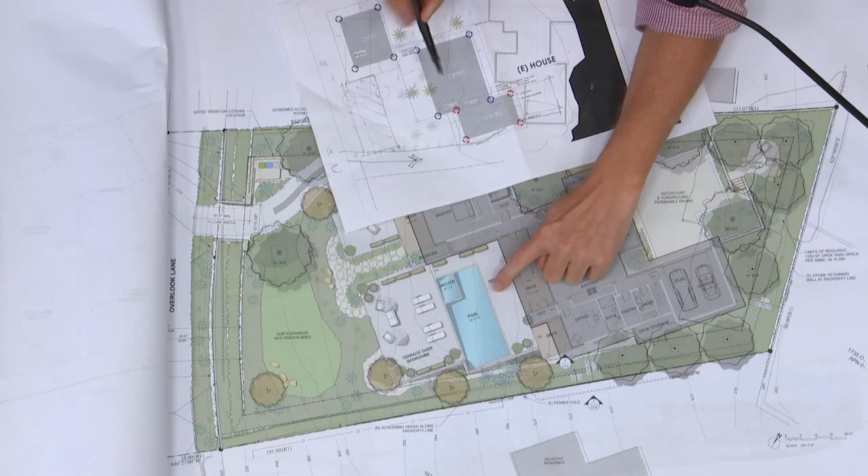Okay, so you're drawing the pool - and where's the deck? This is the deck here. But there's another deck, the lower level - so there's a deck between, right?

So that's the eave. There's the glazing from the main living level to the front edge of the pool, then the pool, and then we have 2 steps down, and that's the roof of the lowest level, which we're also using.

That's the roof, yeah, I see that. Okay, so that's pretty big, right? What size is that? Just curious. Well, let's go to the lower floor plan.

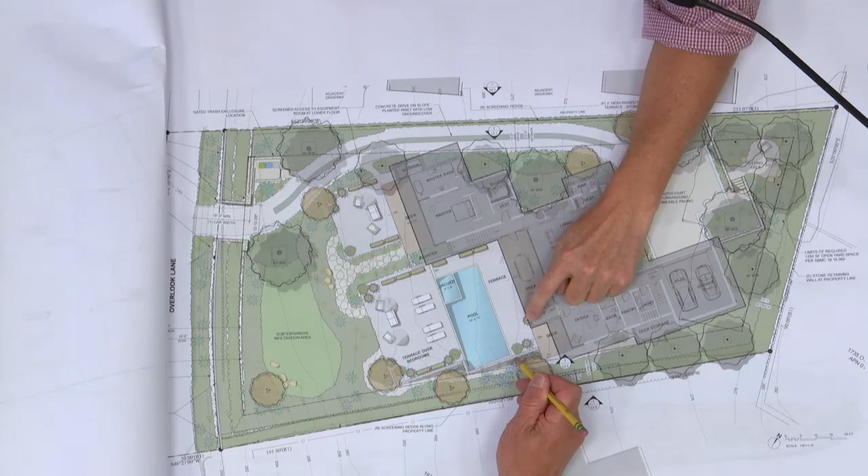Wait a minute, there's a difference between a terrace and a deck. How far is the surface of that terrace above the grade? More or less, 3 steps, 4 steps, so we'll be 30 inches max above grade at that point. So this terrace is 30 inches above that. So it's part of the landscaping, stepping onto the landscape.

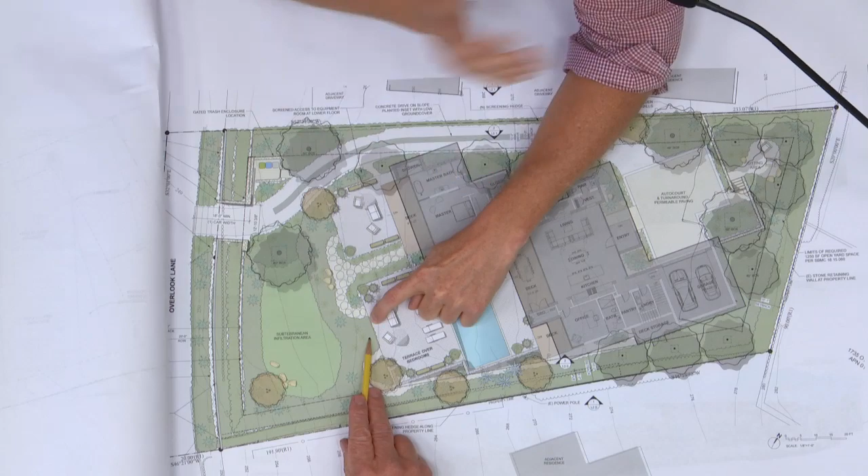What about this side, this guy? Is this like a step down to the slope? This is on top of that lower level, so this edge to the ground is again 10 feet, so it's at 9 foot height inside, that's 10 feet. This deck is how far above that terrace?

Are we 1 step or no steps now? I think this may, we're actually at grade level now. So this level is all level? Yeah, all level. So you walk out over here, this is on grade, close to on grade, because it's only 30 inches above that.

So in essence, you could call it a deck, but it's only 30 inches off the ground. Okay, thank you.

All right, so do we have a motion? Okay, I see no one coming forward to motion, so I'm going to propose some wording and see if it's acceptable.

The board would request that the applicant return with the following comments to the full board: that further study be made of the plate height of the master bedroom suite element in relationship to existing grade.

That the applicant refine the site section in relationship to the west neighbor so that we can visually see the relationship in terms of elevations between the proposed master suite and the westerly neighbor.

And that the board has reviewed the story poles and found that the second floor element identified as the master bedroom slash gym office is within an acceptable range in terms of the view corridors from the variety of adjacent neighbors.

That the remaining issues as previously discussed in terms of architectural style, architectural context, the general configuration of landscaping, the landscape plan, the location of the driveway are reasonably acceptable. So the essence of the motion is to study lowering the bulk and size of the master bedroom wing. That's the motion.

I'll second that. Okay, any further discussion to the motion? Hearing no further discussion of the motion, Cheryl, call for a vote. All in favor signify by saying aye. Aye. Opposed? Aye. Abstentions? One opposed and one abstention.

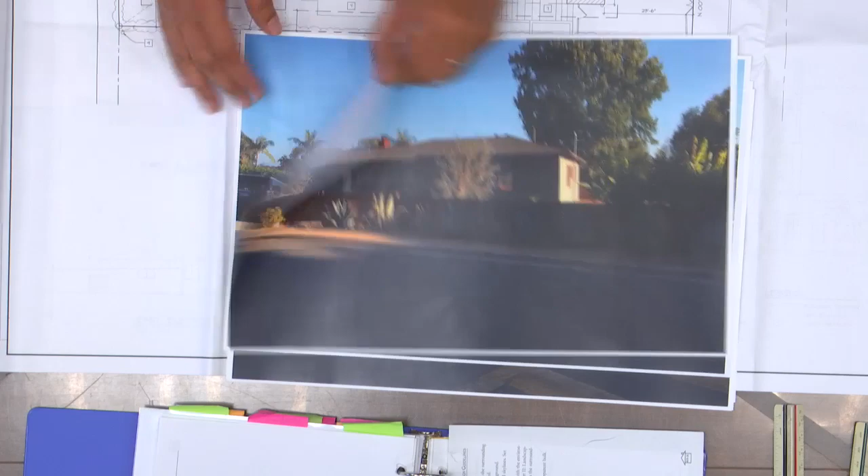Moving along, this is the front of the house. As you can see, more of the house, the front door itself, and the one-story element. This is the house itself, front door. This is where the garage is, and you can tell where the garage door is in relationship to the street, that we're lower than the street.

Then as you turn the corner towards Clinton Terrace and you're looking forward, there's an existing roof of the garage, which you can see we're below, not quite below the street, but the house sinks down because the street raises up. As you're on Clinton Terrace looking back, you can see the house. This is the existing chimney that we're making reference to.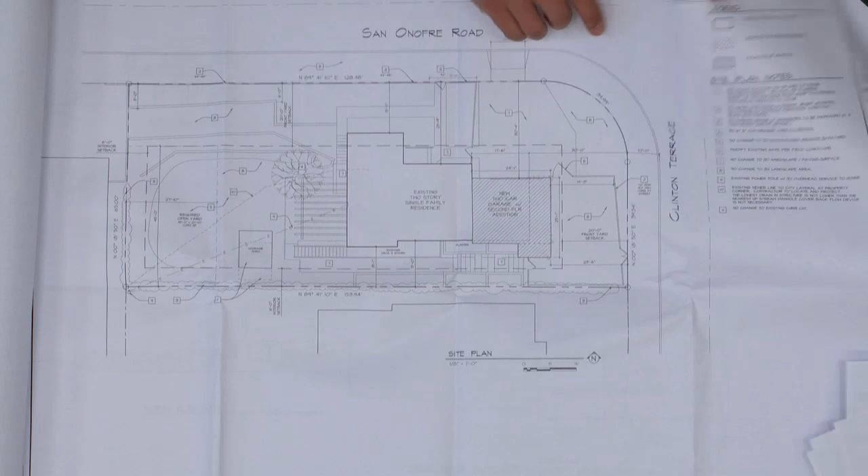This is the existing floor plan, the existing elevations of the house. So the addition of the house is where the garage is located. There's room for a stair going up.

It's a tight stair, and I do realize that. Going up to the second floor, there's a closet, bathroom, master bedroom itself, the wall stack. There's a door to a landing going straight down.

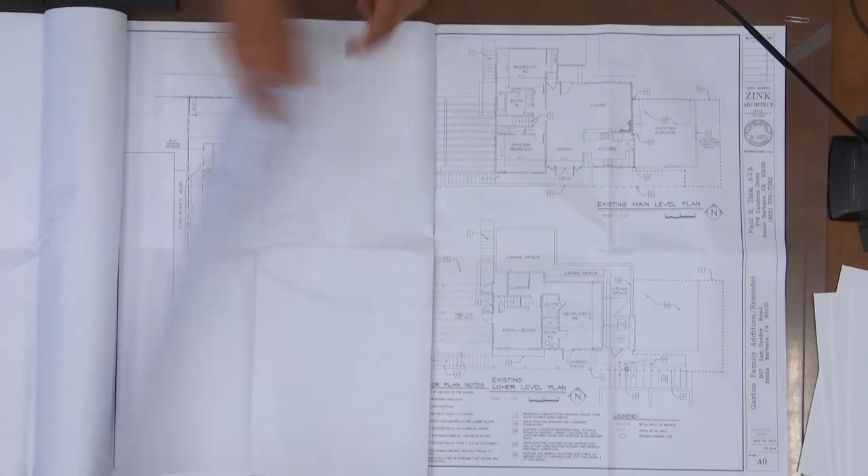This is not considered a deck, but let me go back to the site plan so I can show you what that setback is. I don't remember it exactly. It's right here at this point. It would be about 11 feet, this line. Maybe I have to show my floor plan. It's 11 feet.

Because the deck I'm referring to currently exists, and there's a staircase that goes down, so I'm extending this deck up to a door at the master suite, which is right here coming on down. Then underneath the landing of the stairs, there's a laundry room and the garage.

Elevation-wise, here's the front where the garage is. We're extending the chimney up 2 feet. Hip roofs match the existing hip roofs. This is the bathroom window, stair landing, and traditional garage door.

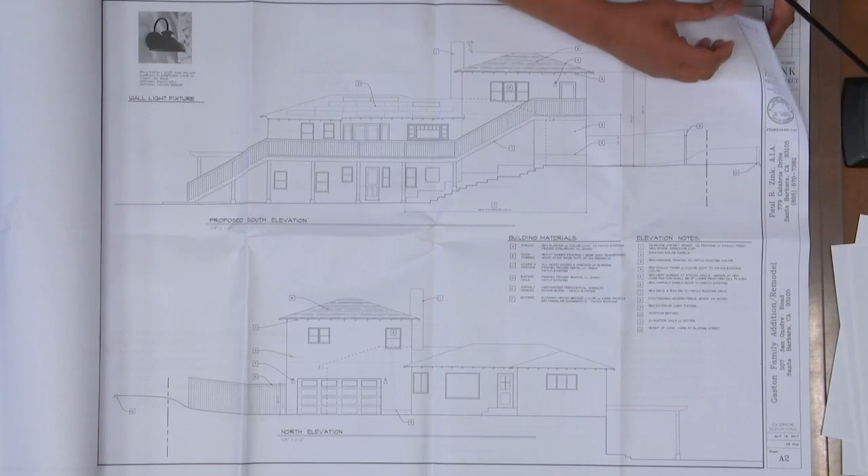Facing where this deck is, this is the deck extension going up to the door and master bedroom windows, the raise of the chimney. And the other side elevation, this is that fence that you would see. This is the amount of the existing roof that you would see, and this is the part you would see above the fence. So that is the presentation, and then some building sections.

Building sections, we have an 8-foot plate on the first floor and 7'10" on the garage, only because the stairs were so tight. So the garage is not quite 8 feet on the interior from the curb. So that is the presentation.

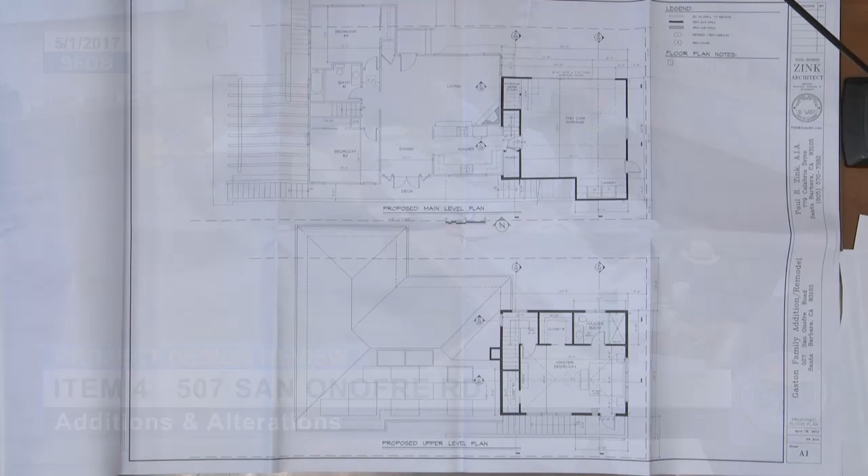Okay, thank you. Katie, did we receive any public communication? No, we did not, Mr. Chair. Anyone in the audience wishing to address this project? Seeing no one come forward, Chair will close public comment and bring it back to the board for questions.

Who has questions? Everything matching color schemes, like for like. And I do have a color board from the previous design when we were doing the two-story element in the back of the building, so there is a color board in the file. Okay, other questions? No, looks good.

You were kind of moving through it a little bit fast, so I want to make sure I understand. This staircase on the site plan is where? This piece of the staircase. This is the laundry room on the first floor, so it comes right across here. So the stair is over the top of these planters? Correct, it's out at that edge. Yes, it is.

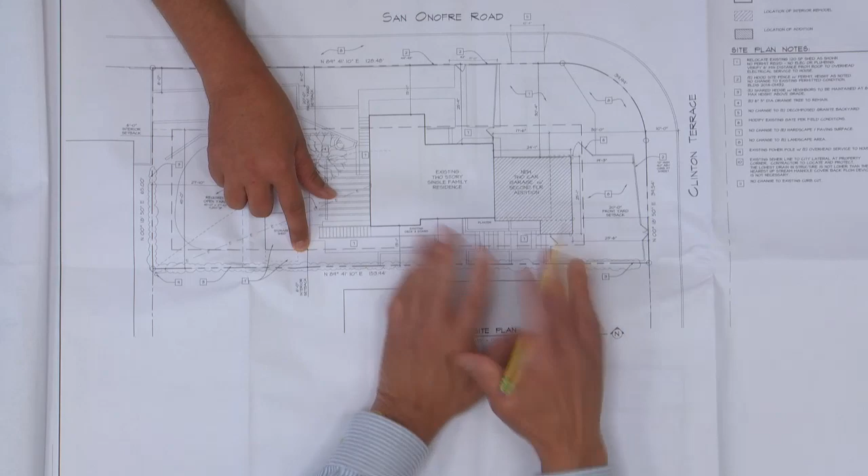Okay, so the setback is where? The setback is right here at 6 feet, so this line is the setback. So that staircase is well within the property? Correct, that's right.

It's just not the 15 feet when you consider it a deck, but it's not an outdoor living space. Okay, all right, thank you.

Are there other questions? Is the second story of this going right on the corner of San Onofre and Clinton Terrace? Correct, so you're right on the corner, 20 feet back on each side. On each side? The setback, the required setback? A little bit more actually, 21.

As you turn the corner, all you're going to look at, except for the steps and the deck coming off the door, is basically two sheer walls. Correct, a sheer wall coming down at the garage door, and a two-story sheer wall coming down all the way on Clinton Terrace. There is an existing window at this location that limited how far we could move this addition forward, so we had to push the addition in order to have a 20-foot setback.

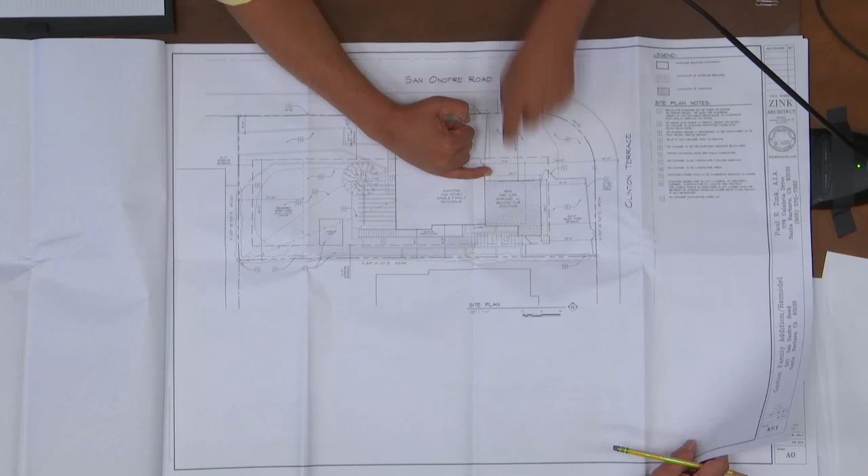Elevations again, because you showed us elevations of what it is now. So that's the elevations, yeah, so we're looking at this from San Onofre. Right, and you're looking at that from right there. And it's just 2 stories, just straight up 2 stories.

Could I make a comment? Well, I wanted to try to finish questions, go back ahead and comment. Anybody else have questions before we do? This really looks like a really long connecting piece to the new second story and the stairway, it just looks a little bit excessively long.

Is there any way that it could be broken up? Okay, really the question is, this part already exists because there's a double door here connecting the two downstairs. So now all we're doing is connecting, so from the master suite you can get down. If we were to move the door on the other side, this staircase would go in front of the kitchen window.

Will there be landscaping? All the existing landscaping is to remain, because really there's just this much of the garage, and then this area is just DG in this zone.

Okay, I do have a question. I was over on Saturday or Friday, I forgot which day, and it appeared they were building a new porch out here. Is that part of this project, or was that permitted separately? I am clueless if there's a new porch being added at that point. They're building a new porch, you can physically see it because the lumber was there and a guy was working on it. I don't know who it was. That was done without my knowledge.

Okay, well you might want to check. I'll add it to the permit. You might want to add it to the permit. Okay, other comments or questions, are we done? Let's go to comments. Joe, you had comments.

Yeah, I've seen a lot of additions above garages all over San Roque, west of San Roque, La Cumbre, and the ones that are just put right on the walls look like additions. This looks like an addition. This will not look like Samarkand. Samarkand is an area, we're supposed to be compatible with the area. Samarkand is an area of very expensive ranch houses that were built in the 40s and 50s.

I'm like, yeah, this is 1/4 inch scale, so the scales are right. So that's the driveway, that's the bottom of the garage door. So I'm measuring 16 feet to the edge of the eave, roughly 8 inches. And over here on this elevation we've got 18 feet.

So one of these is not right. Well, this just drops down. Yeah, so 2 feet, yeah, so there's 2 feet that isn't accounted for - we still got 2 shear walls right on the corner of San Onofre and Clinton Terrace. I agree with you. I'm not disagreeing with you, I just wanted to get the information, and correct.

I think some design - I don't mind the second story right there, but I think some design ideas applied to those 2 shear walls would make that look a lot nicer.

Yeah, I tend to agree with you, but I'm going to reserve my comments till the end. Go ahead. Yeah, I'm kind of seeing it - wonder if there's some way to make the windows in the front elevation work better. I notice that's a bathroom window and that's a stair window, but they don't seem to balance very well, and I think something a little more interesting could occur.

Also the stairway here - I mean, this is really a long, sweeping stairway, and somehow it needs to be broken up, I think. So there has to be something applied to that addition, so, as Joe says, it doesn't look like it's something plopped on top of a garage. But those are my comments for now.

I think that - I'm not going to put some design in here, but I think the change of the balustrades or change of what you're using to put that whole thing in one line is throwing off a lot of comments that don't need to be made, because some of that is terrace and a stairway. If we had a stairway that looked like a stairway and then a terrace that looked like a terrace, it would look a lot better. I mean, we're standing back here looking at a sweeping line of balustrades that maybe we don't like, and that's just our comment.

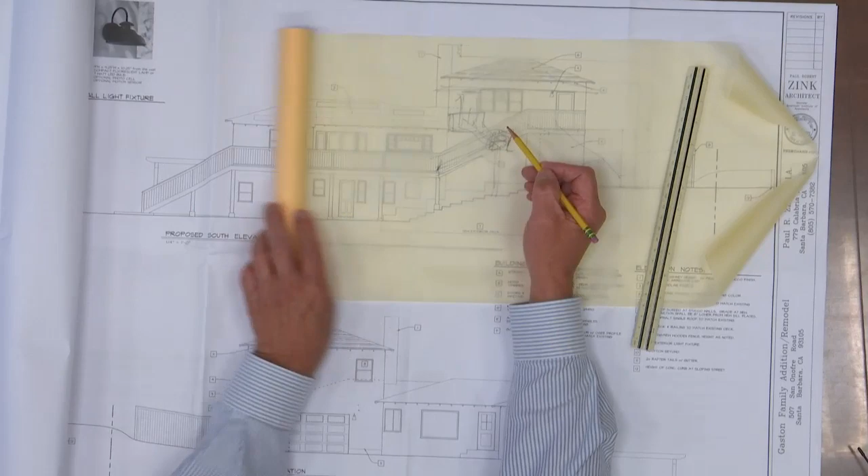If they really want a door out that end, so I think that's a way to solve that problem.

I agree with Joe and others that we see this all over town where things weren't reviewed by this board, and they really look awful. So I think you've got to give some thought here. I realize budget is an issue. Obviously you came back because they had some economic challenges with that addition. But I think you really got to come back and get it redrawn so it looks right.

And then I was checking—you said this was a bathroom window. What am I looking at? Yeah, that's a master bath.

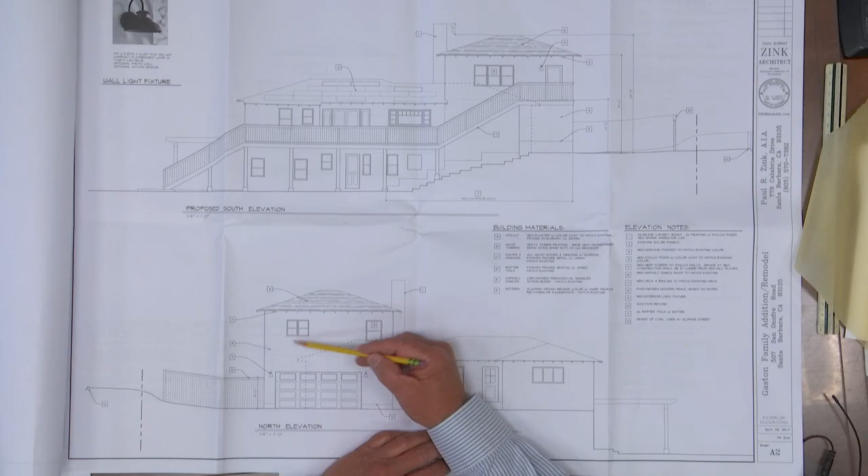Yeah, I mean the pattern language of the windows is all over the place on this house. So it's the existing condition. Yeah, I understand. So somehow, I think that's a bit of a challenge because I hear what you're saying. These look awkward, but I understand they're into a bathroom, so you obviously don't want big picture windows. But somehow the placement of these windows is awkward. And then we turn the corner, you're looking at this thing in 3 dimensions, and all of a sudden we get another style of window.

Ignoring these dotted lines, because they've gone away, you're now just looking at one straight wall, and you got another window style here. So I think the window fenestrations really need some study.

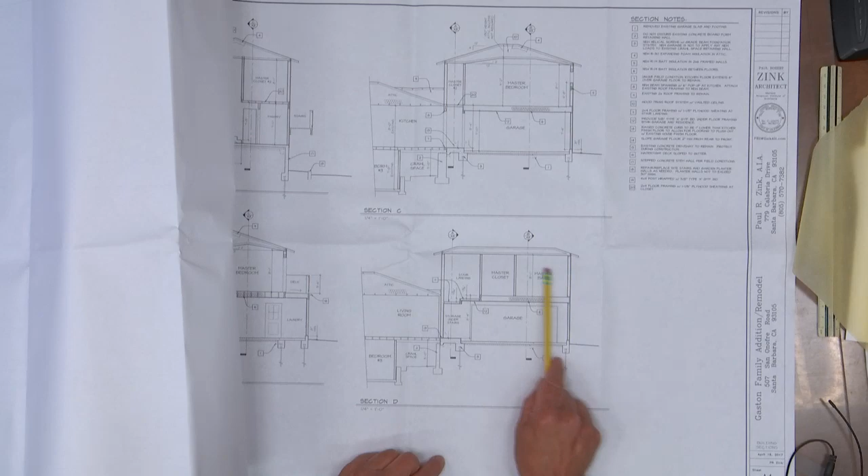And I think the staircase needs a whole different approach and a different study. And certainly lowering the eaves back down to where they need to be is appropriate. I realize you have an 8-foot plate height—I'm going to your sections. But we've also had folks where we've really had a challenge with second floors making them look right, so we requested the sill heights or the plate heights to go down on the edge, to 7 feet or 7'6", and then you have a little bit of a vaulted ceiling inside. That's another way to get the whole scale of this thing down, particularly when it's on a corner.

One of the challenges with this house is that when you turn the corner, back to the site plan, the road—this is not a flat road. This road's coming up, and then it turns, and then it's coming down again. So you can't read it as just a flat street. Certainly the scale thing is helped somewhat by this fence, but I don't recall what the landscaping is here. Again, some manipulation of a new tree, or allowing a tree to go larger, helps the whole scale thing also.

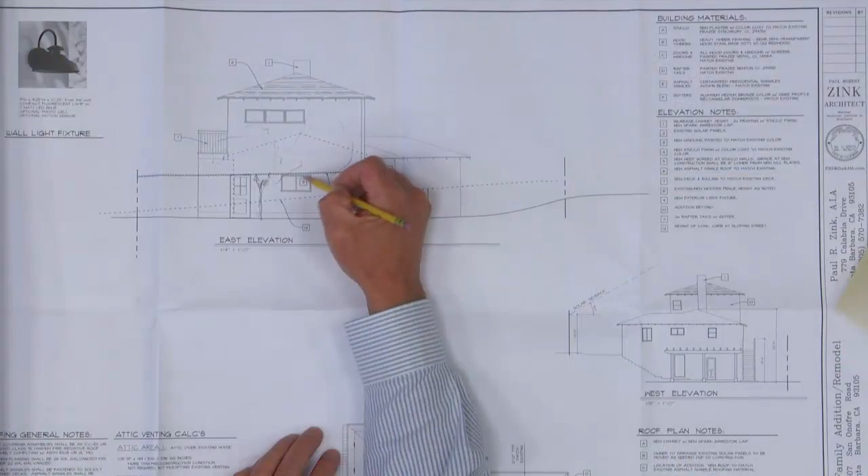Being able to delineate that on the drawing is always helpful, because then you begin to see how that relates to the street, given the fact that you've got a limited budget and can only deal with so many architectural elements, because they all cost money. Other comments? Still looks like an addition to me.

Well, I agree, I don't disagree. I hear your comments. It's not there yet, in my view. Yes, I have a suggestion that might help the north elevation: some kind of trellis over the garage, like a little 3-foot trellis, might be a nice thing to break up the two. That helps usually.

Okay, other comments? All right, so the chair would then look for a motion to give some direction to the applicant. I'll make a motion. Is this comments only, or? Yes. Okay, thank you.

We'd like to have the architect return to the full board with the following comments: study the north elevation, in particular how the windows and the garage relationship and balance work with the rest of the house. Looking at the south elevation, restudy the stairway to the addition as suggested by Mr. Sweeney, perhaps changing the configuration of the exterior stair if needed. Study the different windows to see if there's an improved balance of window sizes with the addition. Correct the height of the elevation to match the sections. And that's my motion.